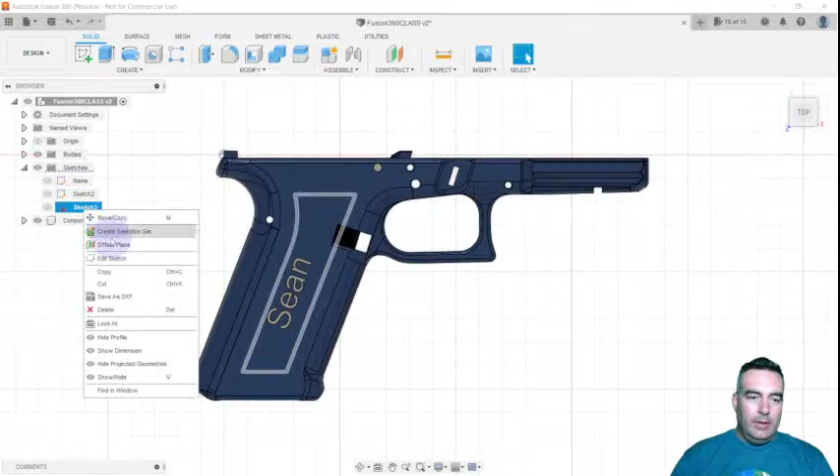We went over your sketches over here. We went over components. Let me delete a couple of these so we can start from scratch. Cool, so we went over the sketches and the components.

If you ever want to not see your component, you can always turn it off with the eye function, just cross the eye out so you don't see it. And if you were to save it like this, or create your STL file from this, the name would not be on there. Whatever components you want to be part of your final project, make sure the eye is visible so you can actually see it on your project.

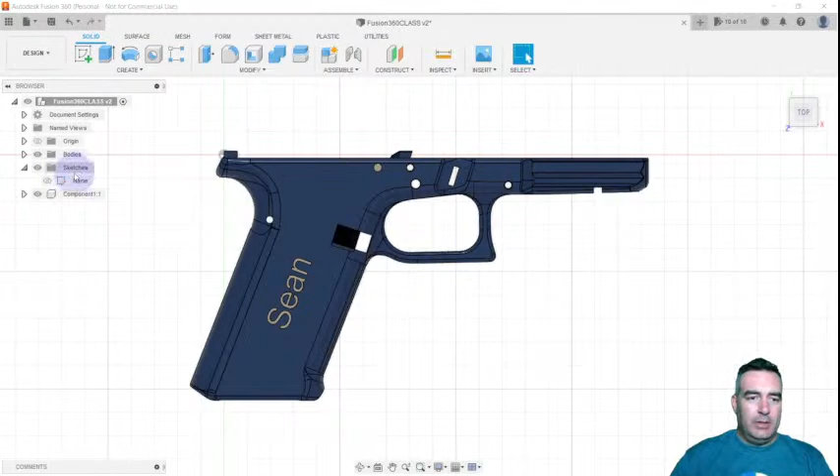So today we are going to go to the other side, and we're going to do a couple things here.

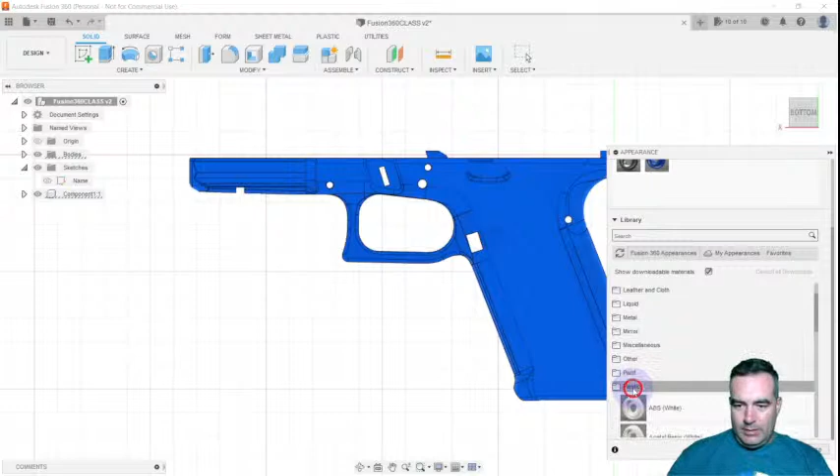One, I think it's kind of hard to see, so let's change the appearance. You can change the color of whatever you're working on, or the appearance. My computer doesn't really like me, so let's just see... where'd beige go? I saw beige. That would be a good one. Boom, it's beige. Okay, don't worry about it, this is just for demonstration purposes.

Okay, so let's create a couple things. One, we will create a raised grip pad, then we'll get rid of that. Then we'll do an outline for the grips, and then we'll get rid of that. And then we'll also do an extended outline with a curve in it. That'll probably wrap us up for today, should take about 20 to 25 minutes. So let's jump right into it.

Remember, everything we do has kind of a process we want to go through. We want to make sure we're on the solid tab up here, in design - most of the time we are. Before we ever add anything, we always want to create a sketch on the plane that we want. For example, whenever you go over your object, any of these things being highlighted are separate individual planes on different dimensions within your 3D object.

So let's create a sketch. It's asking us, hey, what plane do we want? Where do we want this within the three-dimensional space? Since we're going to do a grip module, we want it over here on the handle. So let's go ahead and click that. It's selected it - it likes to rotate it for some reason, I'll just flip it back. And now let's create a sketch, let's use this line tool.

So when you look up here in your toolbar, you'll notice a couple different things have happened - we have a bunch of new tools. Remember, we're going to stay within these blue tools. We don't really worry about these other constraints or anything like that right now. Let's just live within these blue tools, specifically the line tool.

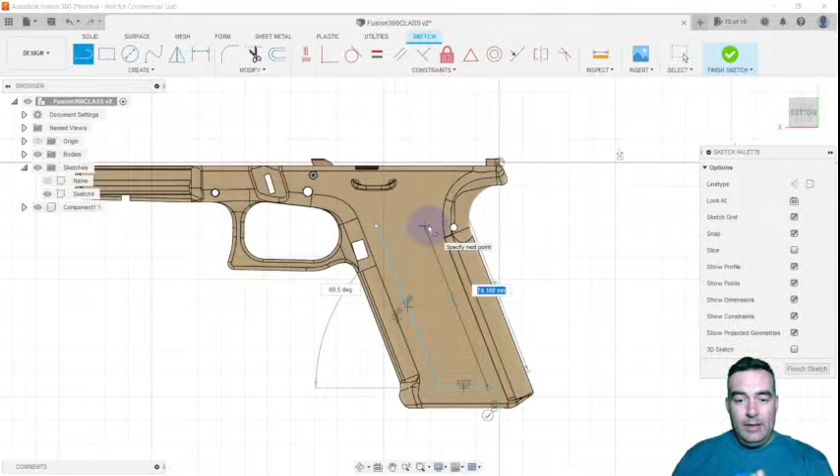So now if I drop this point here, I can see that A, it's parallel going up and down to the line on the left, and B, it is equal to the point that I want to close it off to. So let's drop it and go over here and close it.

Cool, so we just created a closed object. When it highlights itself like that, that lets you know it's a closed object. So let's go over here and hit finish sketch. Boom. Now we just created a two-dimensional object on a three-dimensional object.

And so now to turn this into a grip plate, what we want to do is extrude it out. So remember, hit the S key. That's going to bring up the search function. And now the search function is your best friend.

Once you grasp that concept and you do your workflow like this, it will just be so easy. It'll be a breeze. Even if you forget how to do something, if you just remember to hit your S key, you can search for whatever you want to do. You just got to know the names of the tools that you want to use.

So for example, we want to extrude. That's an E. So we'll start typing extrude, and look, it already pops up. Boom. It's going to say, hey, select the face you want to extrude, so we can hover over whatever we want to make come out. Right now we want to use our sketch to extrude that out. So we select it, and for purposes, I'm just going to use 2 millimeters for all the distances on everything I do in here. So let's extrude it out 2 millimeters.

And remember, over here under operation, never do join. Do join if you want, but I never do, because sometimes I want to go back and change it, and it's a pain in the butt to change. So what I do is I always do new component. What that's saying is that what we're extruding and creating is just a component of the final project, not the final object, but part of the final object.

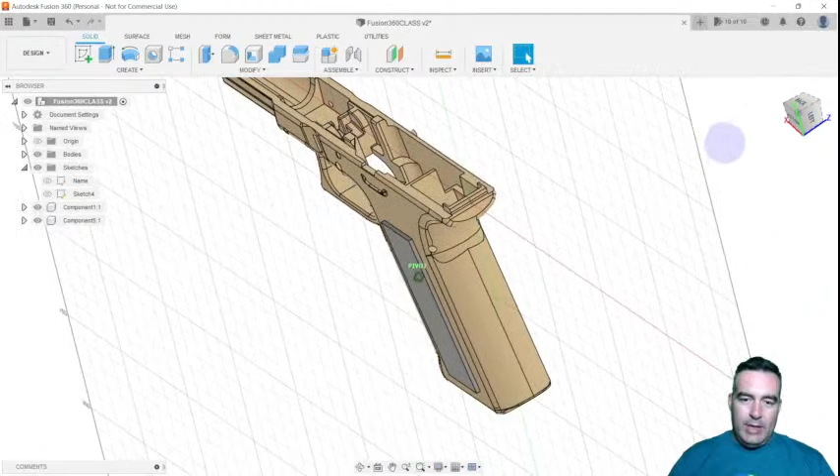So let's go ahead and hit OK, and boom, you'll see over here it creates a new component. And also, if we use our little tool here, we can see that, hey, look, it extruded it out 2 millimeters. So if you like it, cool. If not, you can always say, actually I don't like it, and turn it off. You can delete it if you want, but turning it off is sometimes the best, because you might want to come back and actually turn it back on.

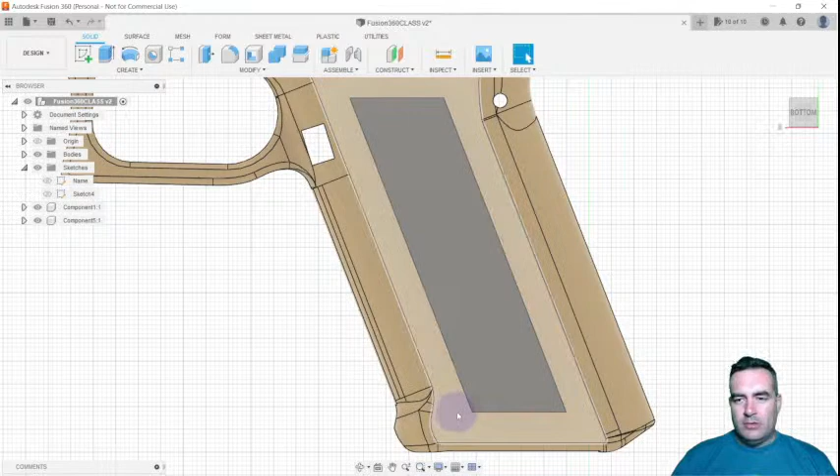So now, looking at it, that looks pretty cool. But let's say these corners might be a little too sharp. Once they're printed, you realize, hey man, those are some sharp corners, they're tearing up my hands. So I kind of want those to be rounded. So what we can do is you can actually change the shape of any individual line if you want. Let's click on these vertical corner lines.

So the lines that are coming out, and we can come down here, and you can do one line at a time, or you can do multiple lines.

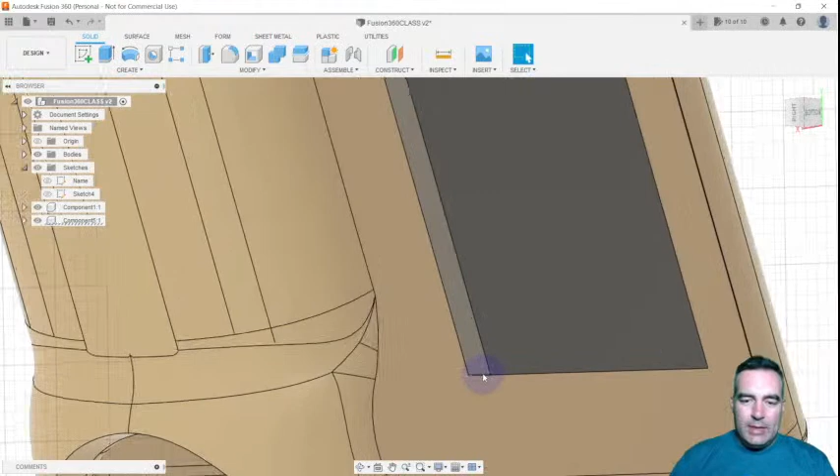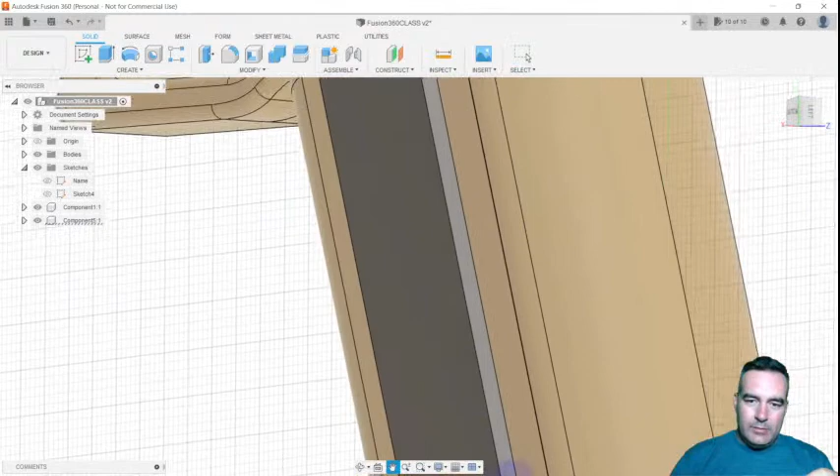If you're going to do multiple lines, anytime you select a new line, make sure you hold down the control button first and then click the line, and that'll add it to the selection. So we can also select this line here, we want that vertical too, so control left click, and you can see they're both highlighted blue, which tells me everything is selected right. That's also highlighted blue because we're going to change that. Now that they're all four highlighted, the tool we want to utilize is called the fillet tool, and it's going to round the edges.

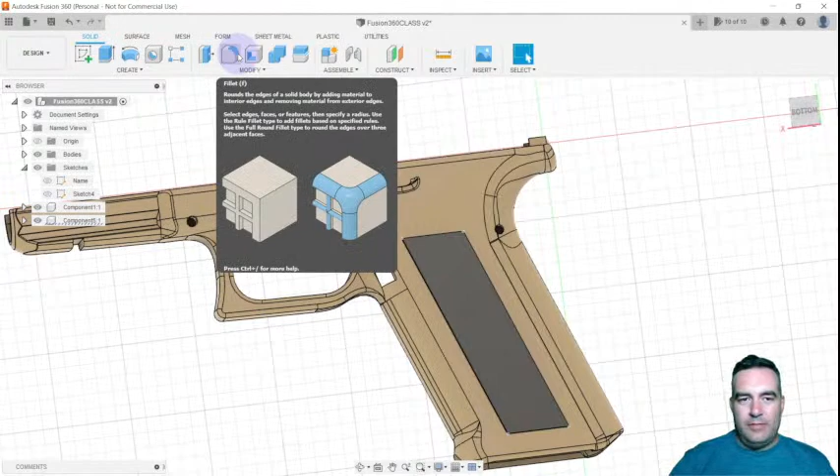So there's a couple ways to get to it. Since it's a common tool, it's listed up here on the bar, it's fillet. You could click it if you want, but really get in the habit of hitting S, which brings up the search dialog box, and we want to use fillet. So F-I-L, and it's right there.

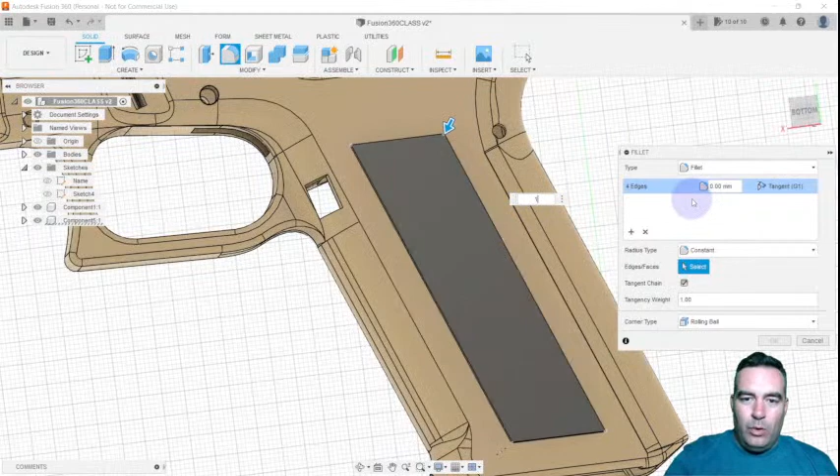I was going to use 2, but I'll do 1 first so you can see the effect, and then I'll use 2. So if I type 1, you'll see it rounds those corners on all of them. Let's zoom in a bit more, get rid of that 1, and put in a 2 - look at that, it rounds those corners even more. So we can hit OK, and now we can look at it, and it's rounded. So now the corners at least aren't going to chop up our hands at all.

So that's one way of extruding. You can use that fillet tool on a lot of things, so I'd experiment with that fillet tool, all that you want to do.

Let's say, how do I want to do this? Okay, so now let's do an outline.

So this is the grip module or the grip panel completely filled in. Now let's say you just want an outline around it. One way to do it, and a very simple and fast way, would be to turn that off. Let's go back to our sketch, turn the eye on for the drawing that we made, and double click over here on the sketch to reopen it back up so we can edit it. Let's reorient this. Now this tool is also really helpful here - let's check out this offset tool.

So if we click offset, what that's going to do is say, hey, select a line you want to offset, create an offset line for. Right now this says chain selection, meaning all lines touching each other or touching the line you're selecting are going to be selected. In this case that's okay - some other advanced circumstances it's not, you don't want to do this - but here we're just going to leave it selected because we just want to make an offset for all of these lines anyways.

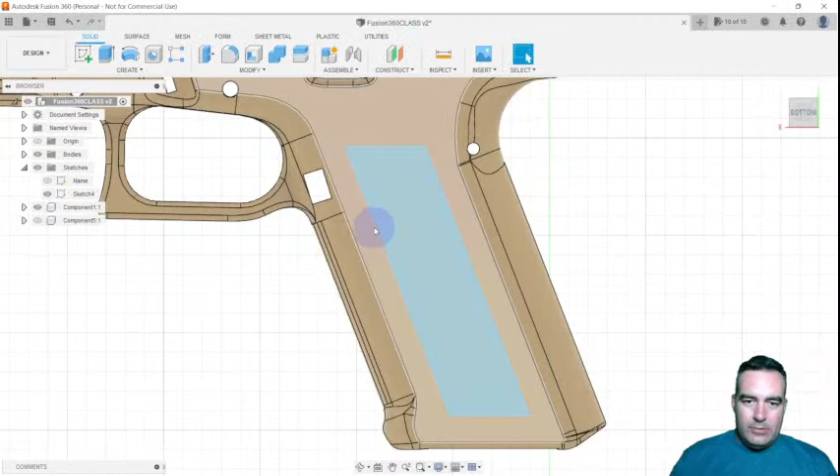And so let's finish the sketch. Now you can see when we hover over our sketch, we have two different things we can click on - this inside box, and now this outside frame. So what we want to do, if we're looking to create just an outline, is click on just the outline frame, and then let's extrude it. You're going to hit the S key and then type in EXT, start typing extrude, and then select it that way.

Once that becomes second nature to you, you're going to start learning hotkeys. Hotkeys are just a faster way to get to the most common tools you're going to use. For example, the hotkey for extrude is E. You can just hit E and it's automatically going to bring up that extrude setting. It's just a faster way, and it'll make your workflow go faster as you get through it.

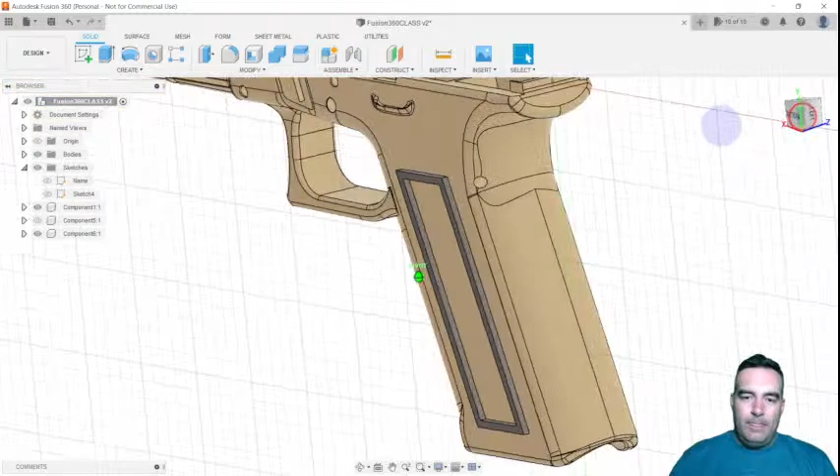So like I said, let's do just like we did before, 2 millimeters, and we're going to extrude that out. Then we're going to come down here. We're not going to join it, it's going to be a new component. And then we'll hit OK. So then we can turn off our sketch because we're done with it. And look, we created just the outline.

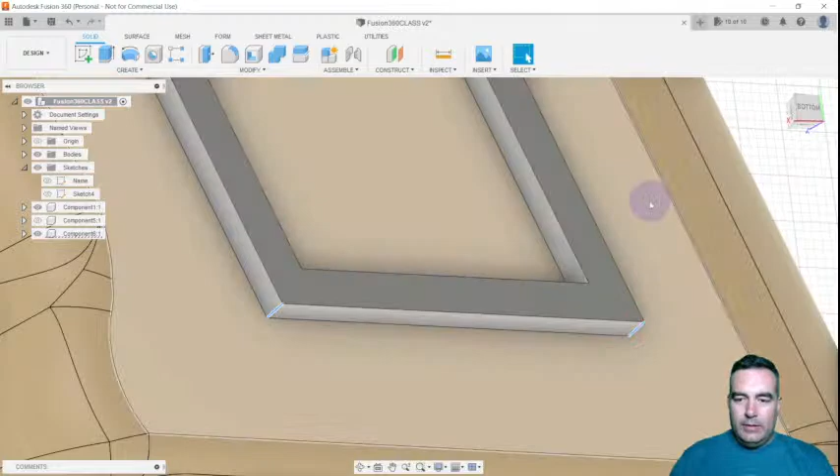Let's say these edges are too much. You can go through - I left clicked, zoomed out, zoomed in, control left click, came over, control left click, zoomed out, came back up. Let's turn this so we can see it. Control left click, and you can do all these individually if you want, but it's just faster to kind of do it this way. Once you've done it once or twice, you'll probably select multiple things all at the same time. Plus, it just makes it even.

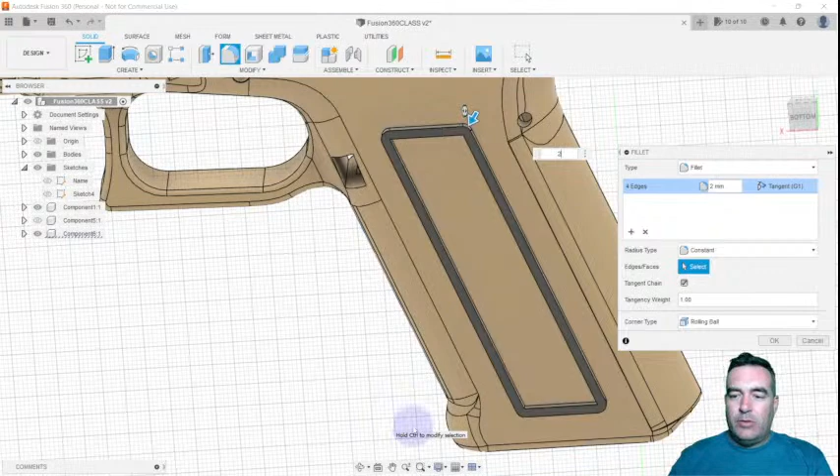So again, you can hit the search key or hit S to bring up the search bar and look for fillet, because that's the tool we're going to use. Or just like extrude with E as its hotkey, the fillet hotkey is F. So we can type in F, and boom, it brings up the fillet tool right away. Again, we did 2 on the last one, so let's do 2 on this one. You can see it rounds them right away, and we'll hit OK. So now we have just a rounded outline.

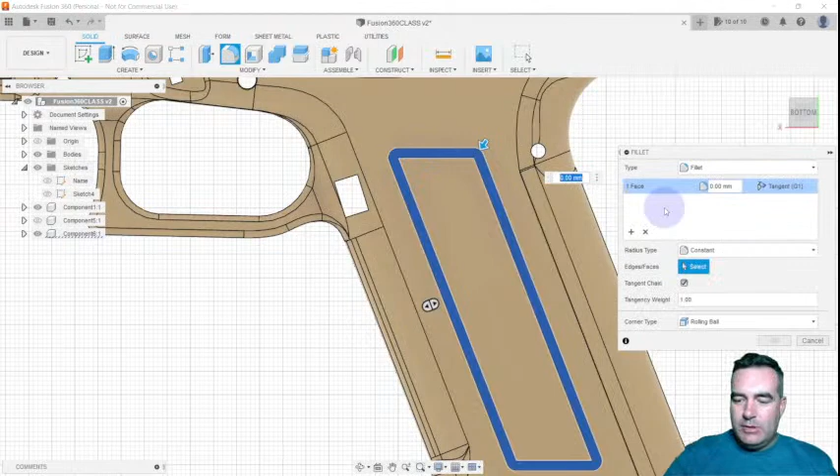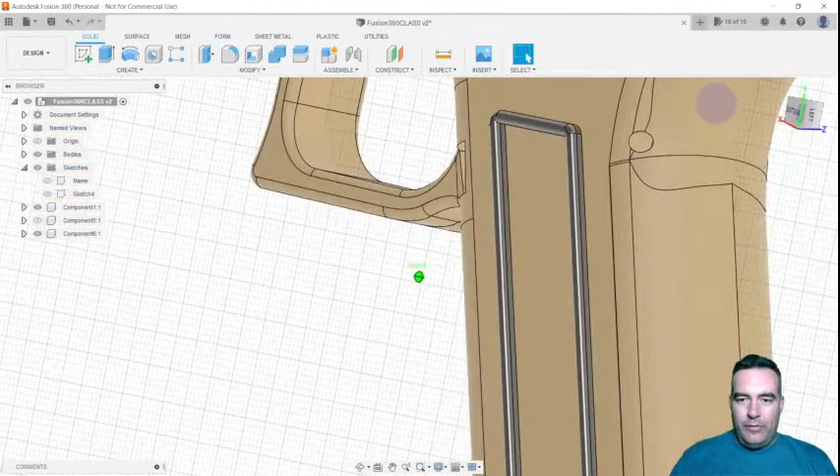Another cool thing you can do - let's say you have this outline, but now these edges on the outside are going to be sharp, on the inside and on the outside. So you can either select just the edge, or let's experiment with something. Let's select the whole top face and hit fillet. Let's go to the fillet tool and just say 1 millimeter. Let's see what it does. Whoa, you guys see that? Let's zoom in and see exactly what it did - it just rounded the top edges. So now when it's in the palm of your hand or your support or whatever, it's not going to be super rough and edgy on your hand, it's going to be nice and round. That's a pretty cool feature you can do, and you can experiment with that on a lot of things.

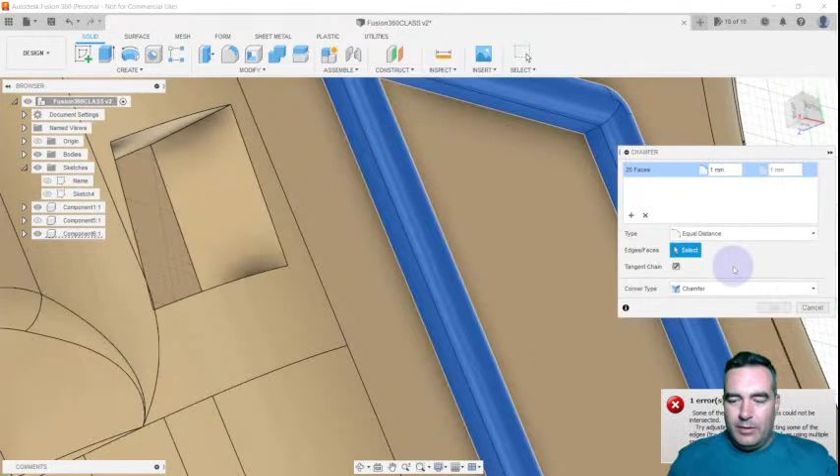So we have that rounded. Another tool you have could be chamfer. Let's look at chamfer. Let's select these outside edges because this is a pretty sharp edge right in here. So you could do chamfer - I'm not sure, I haven't done this yet, so we're going to experience this together. We're going to chamfer that, and let's just say 1 millimeter. Will it even work? No, it gave me an error. So let's adjust the size. Okay, that's not going to work. Adjust the size - okay, so the size isn't going to work. All right, I'll have to play around with that another time.

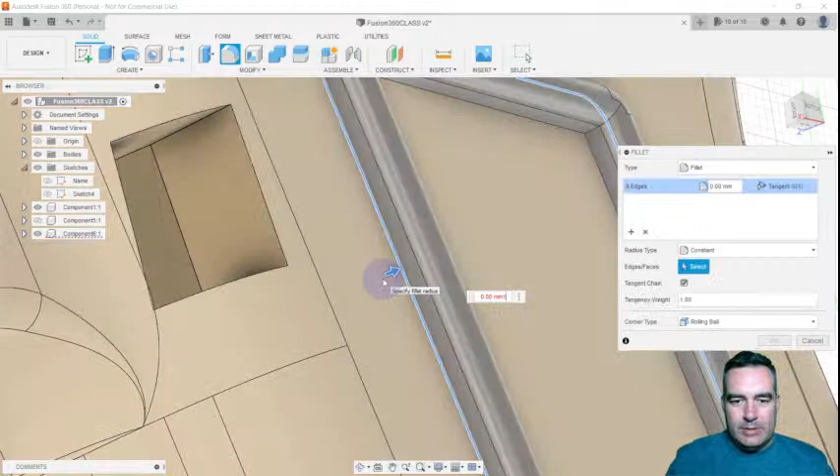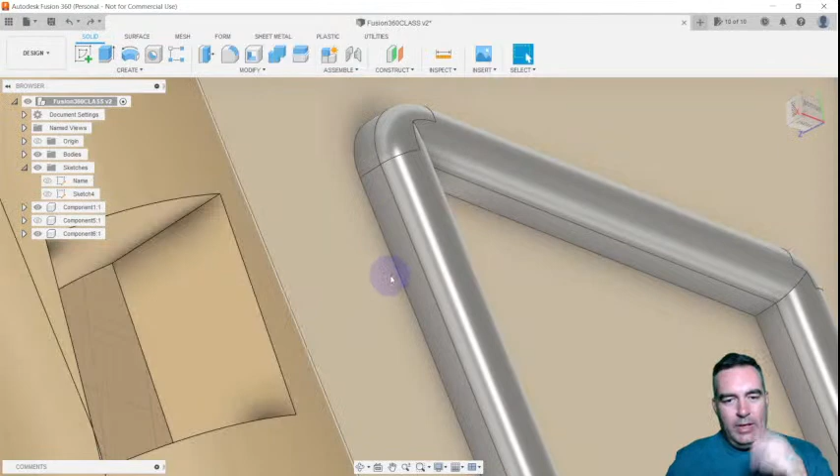Chamfer is kind of like a fillet, but it's different than a fillet. I'm sure you could probably play with these lines here for a bit. If you wanted to select just that line and do a fillet, you could - and what would that do? Let's zoom in on that and look. I would have to see. Oh, okay, so that rounds it out like a ball. We don't really want that, we want it more like a wave. I think that's where chamfer would come into play. Yeah, so maybe it's the line that I needed to select. Let's see - oh, that was 1, so let's say -1.

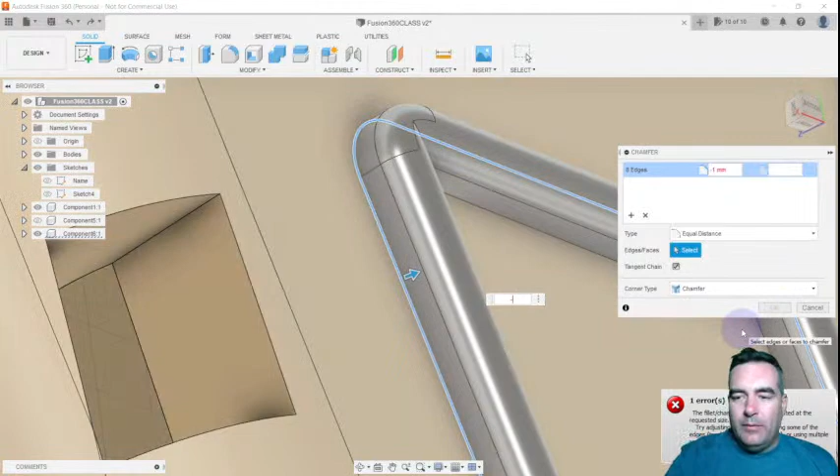Nope, that's not going to work. Anyways, I'll play around with that. But there are ways to get that to blend a little bit better if you wanted to, but we can go into that another time. This will just kind of get you in with the basics here.

So now let's say, looking at this, yeah that's cool and all, but let's say we wanted this to extend up and match the curve up here. So what we could do, let's turn this one off. And look, we still have the full one. So we have that one, we have this one. We're creating options that we can mix and match on this thing.

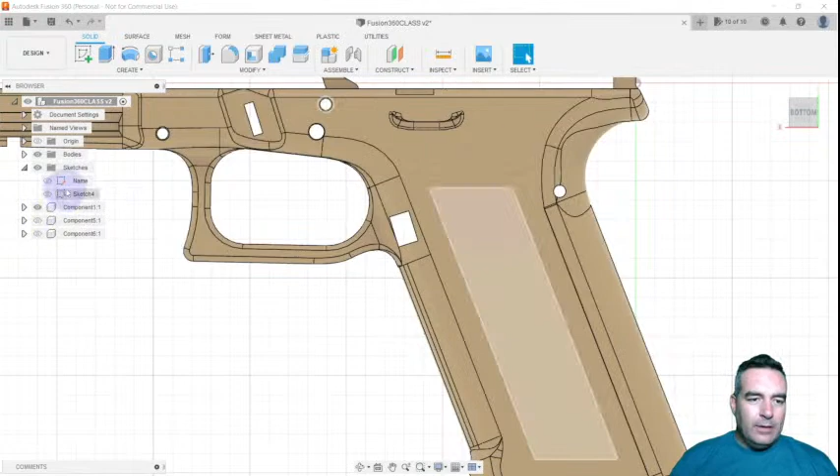Let's go back to our sketch. Let's turn our sketch on. Let's double click it because we're going to change this up just a little bit. And you'll see we're utilizing the same sketch for multiple things, so that's pretty cool.

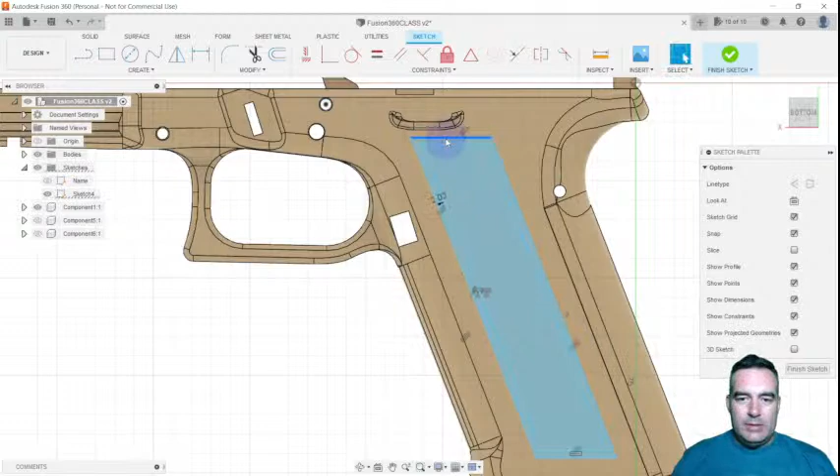Okay, so in order to edit the sketch, we can click on just this top line and drag it up a little bit. We want it to be a little bit taller. Well, let's say we want it to go up to there. And then we have to add to it a little bit.

So let's get our line tool back out. Whenever we see that square, that means we're dropping it on a previous point. So that's where we want to left click, and let's drag this out to about here, left click, and hit escape. So now we have this open line out here that's not really doing anything for us.

Here's another advanced feature, check this out. Go to create, go down to arc, and we want to make a 3-point arc. So we want to close off this section here. Let's get that square around our point, so we'll left click.

And let's say we want to come down to about here. Wherever you see that like a blue X on a previous line, that means you're dropping your point on a line, which is what we want to do, because it's going to eventually close off this object and then we'll be able to extrude. So let's just drop it.

And now, remember, it's a 3-point arc. We have 2 points down and now we need to lay a 3rd point. This 3rd point shows us that it'll control the bend in this arc. So we can go, let's say we want to do maybe like right here. That's kind of close enough. We can kind of edit it a little bit, but right here is fine for now.

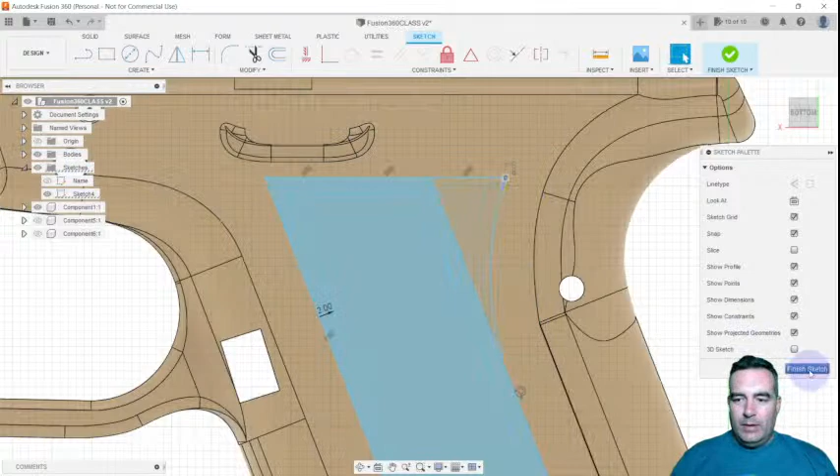We'll do that, and then we'll just hit escape and that'll get us out of there. And we can actually adjust this a little bit by just dragging this point right back a smidge to where we want it. So let's say that looks a little bit better. And we will finish the sketch. So now we've adjusted our sketch to kind of match the curvature a little bit.

And now let's extrude all of this. So we can hit the E key or search for extrude. And now it's going to say, hey, let's click on this button here so we can select the profiles that we want. So anything that's going to be highlighted will be selected. So we want to extrude that.

We want to do the outline and the hole, so we're going to do this whole thing. Let's extrude it out 2 millimeters, just like we've been doing, and we're going to create another new component. So we're going to hit OK, and let's turn our sketch off because we don't need that right now.

So now look at this. Boom. Boom. We got it. Just like before. And so from here, you can do a couple things. If you want to keep it full, you can keep it full. You can fillet the edges. Or let's say you want that outline again, well if you want that outline again, check out this tool.

So what we're going to do is we are going to create a sketch. So this is another way to do it. We're going to create a sketch. And what we're going to do, we're going to click on this plane here. So this is the extruded, this is the top of the extrusion that we just made. So this is a different plane than the grip itself, because it's now three-dimensional.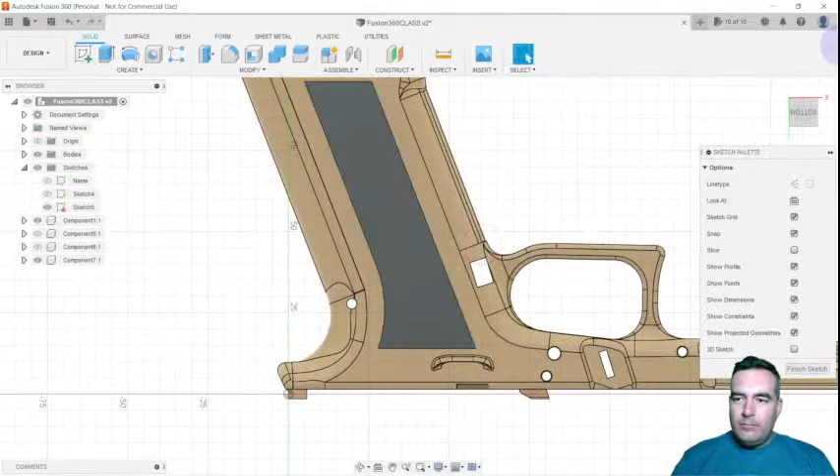Let's click on the top here, and that's going to create a plane out there. And what we can do is, so we created that, let's use the offset tool again. And let's click on this line here.

And then let's do -2, because we're going to stay within. We want an outline, we're going to do that. We're going to say finish the sketch.

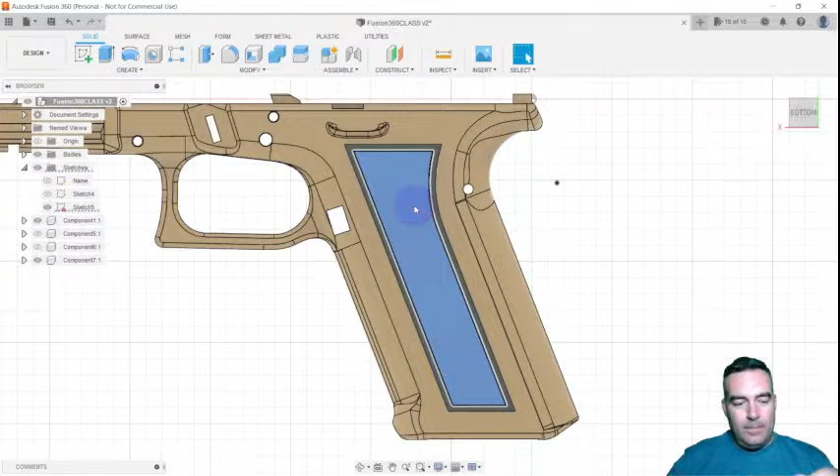Now what we're going to do is select the inside here and hit the E key. Again, it's going to extrude. You could do search, hit the S key and type in extrude, or come up here and hit the extrude button, but the E key is the fastest way to get there.

Now, we don't want to extrude it more, we want to reduce it. We want to cut that material out and take it away. So we know we extruded out from the frame 2 millimeters, so let's extrude back to the frame, so -2 millimeters. This is automatically, when you do a negative, going to go to cut, which is fine.

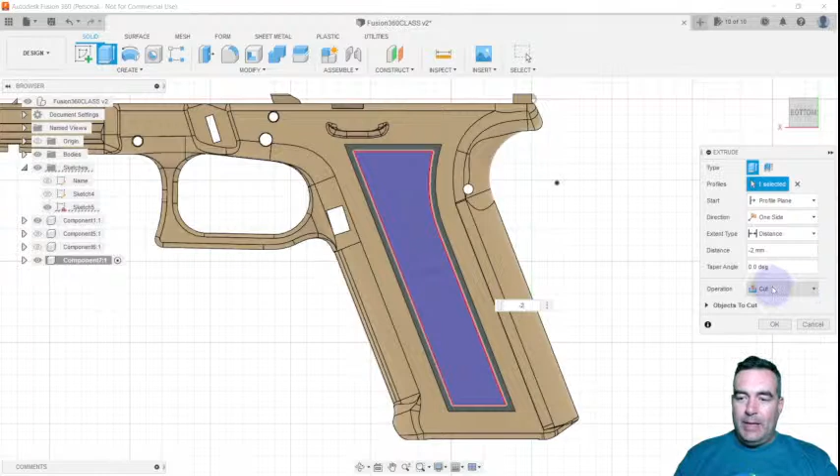We want to cut that material out. So then you're going to hit OK, and boom, it just cut that material out. So now you just created an outline of your curved offset.

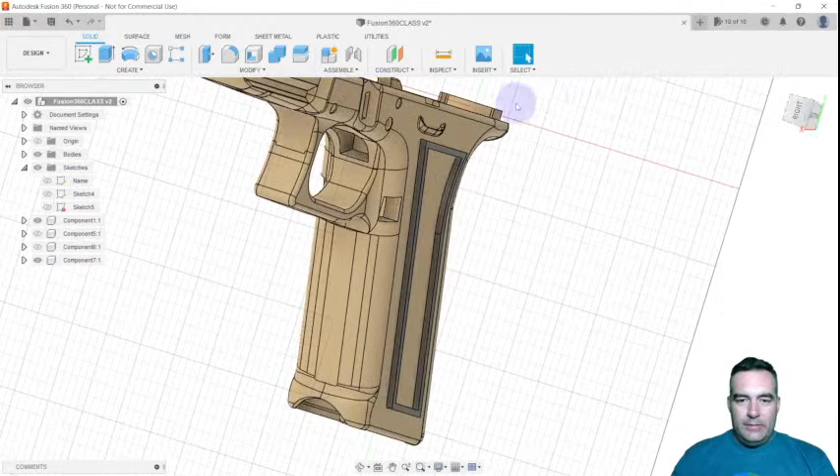Grip handle. So from here, if you wanted to, you could go through - did that a little too fast. Let's say these edges are a little too sharp, so we're going to just go through and fillet them all to make them all rounded, because that round look is pretty cool.

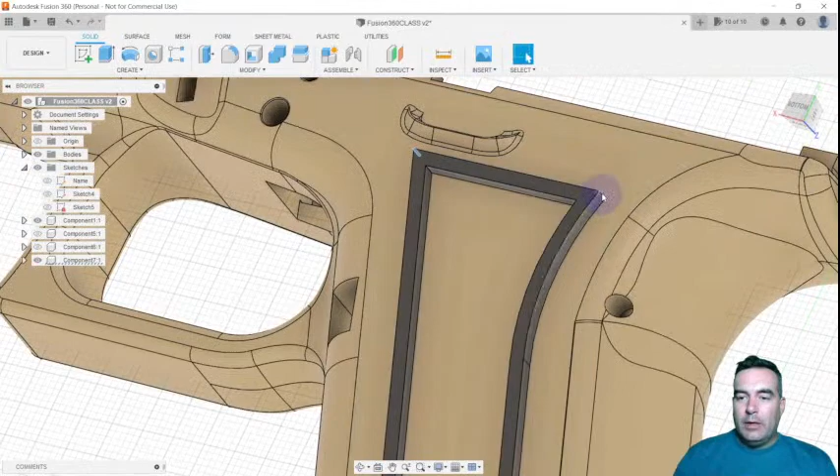So again, control left click on the corner vertical lines. Let's zoom in a little bit, control left, and then we're going to hit the F key to fillet, and we're just going to fillet at 2, and then we're going to hit OK.

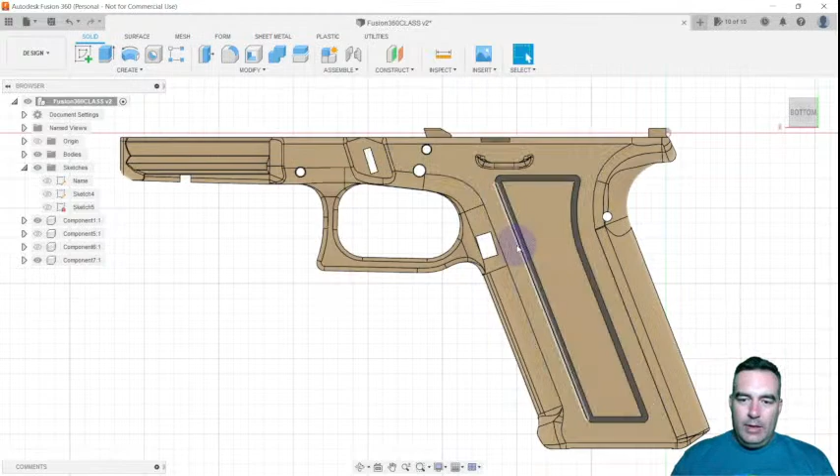See, so now you have rounded corners, you have the rounded grip angle up here, and hey, furthermore, we could actually even fillet this. So let's round that off.

Let's put a - oh, it doesn't like the 1, because of the edge. What about a 0.5? It'll do a 0.5, that'll just round it, give it a little bit of an edge. So sometimes when you get an error, you have to adjust the size of your fillet.

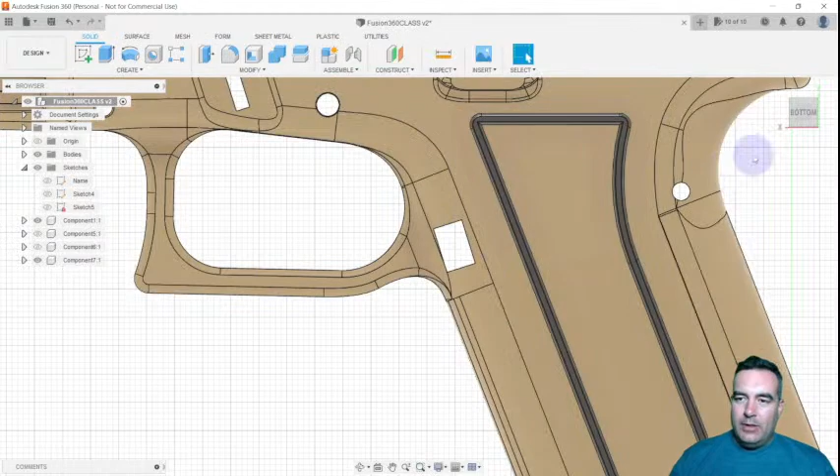So I was starting out with 1 and I just changed it to 0.5, and you can see here it left some flat surface on the top and it just rounded the edges just a little bit. You can see it rounded both the inside edge here and the outside edge here.

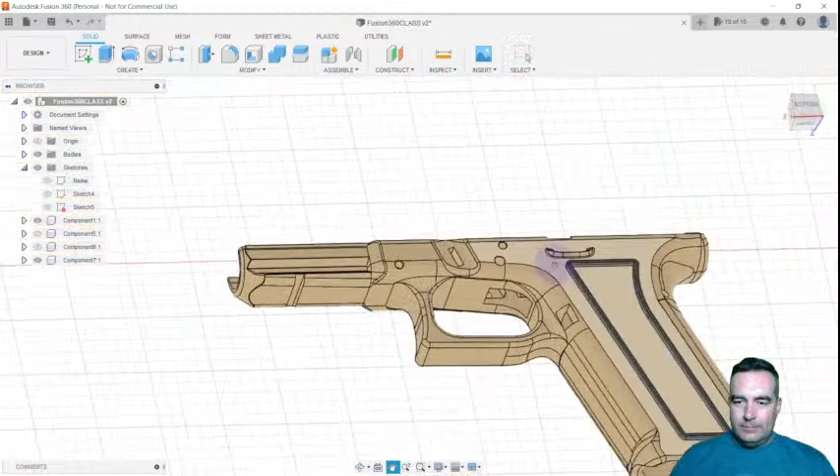And so now that's what it looks like. From here, you can do a lot of things. This should give you enough basic tools though at this point to kind of customize this how you want.

If you wanted to put a gas pedal over here, you can utilize these same tools that I just taught you to create these outlines and those extruded grips on this gas pedal up here using the line tool and extrusion and fillets.

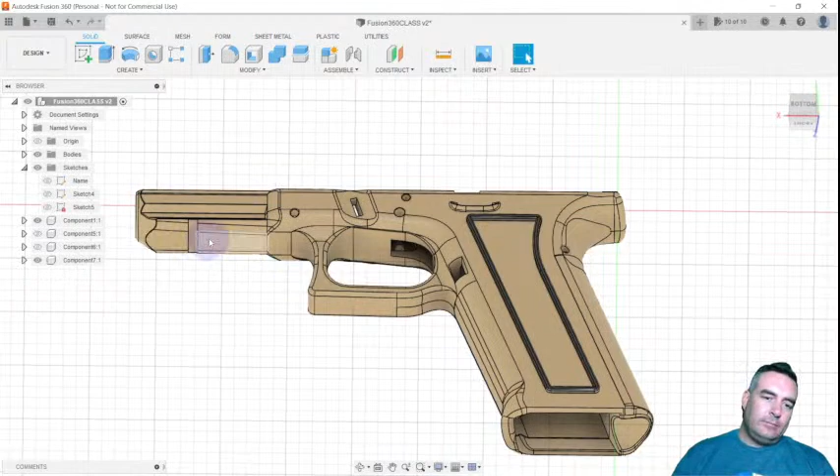If you wanted to create more of a Picatinny rail system over here, you can definitely easily do that by copying this and pasting it over and using the cut tool instead of the extrude tool. You can cut this material out.

You can do a double undercut right here if you wanted to, by just drawing using that 3-point arc and drawing a line and then using your cut feature.

You can add grips. There's a ton of things you can do with just those simple things that I just taught you. That's how I learned, and I just adapted those things. I was like, hey, what happens if I use this process that I learned over here? What if, can I apply it over to this? And that's how I started to learn.

The very next lesson will probably be the last one that I'll go over for these basics, and it'll be about how to import designs and put designs onto here.

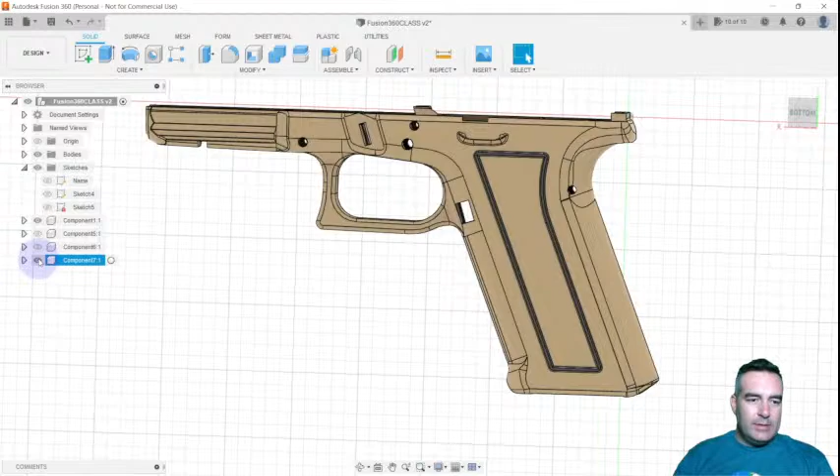So you've seen we did this. Let's say, hey, actually I don't like that one. I like just that one. Or maybe I didn't like that, I like just the filled in one. You can go down here and literally customize your gun any way you want it.

And if you save this, you can rename these to certain things so they're easy to see and add. You can have essentially a blank frame and just say, on this frame I want the high edge outline. I want a gas pedal, so I'll turn that on. I want my undercut here, so I'll turn that on. You can customize your gun just through toggle switches now, and print anything you want on it.